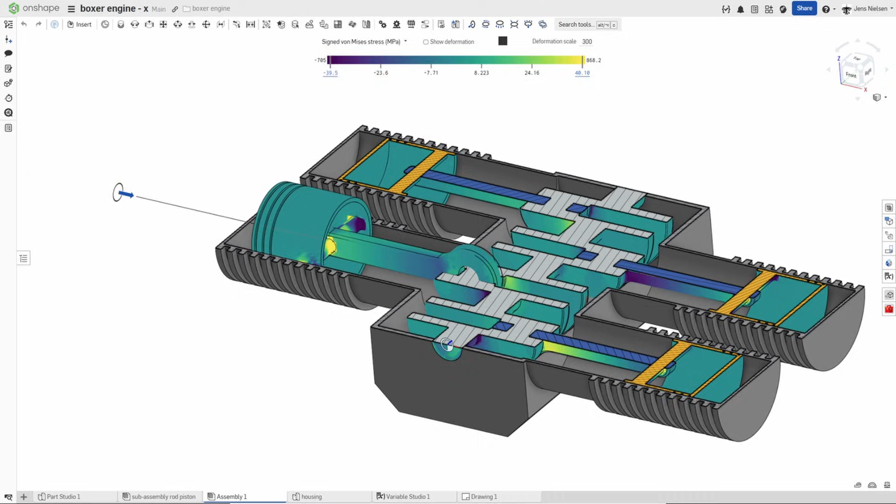We're moving beyond kinematics to see if our engine internals can actually handle the heat using Onshape's professional simulation tools. Before we start clicking, I want to consult our Onshape AI Advisor and ask him about how to set up a simulation.

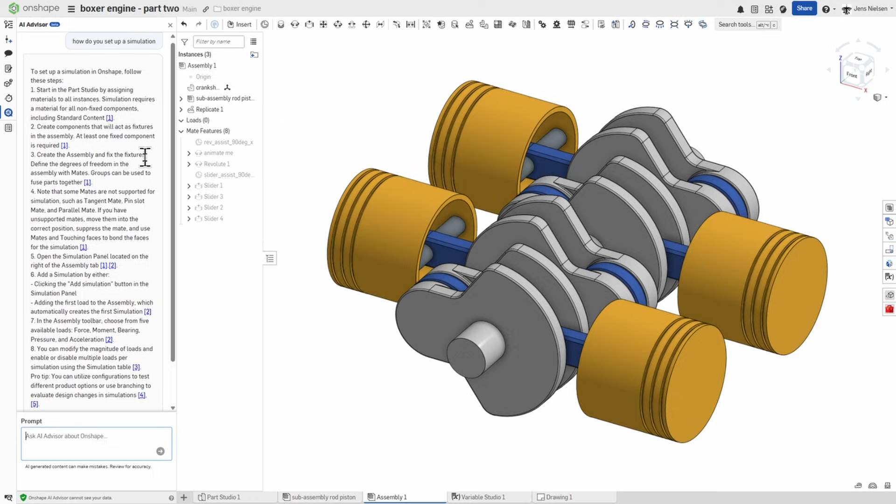Here is the reply. Okay, first you need to assign materials to all parts. Then you need at least one fixed component. Okay, I'll keep that in mind.

So now I want to illustrate in-context design using our engine. First, I'll rotate the crankshaft to top dead center. Now I'll go to the command create part studio in context, show our mates, and pick this one.

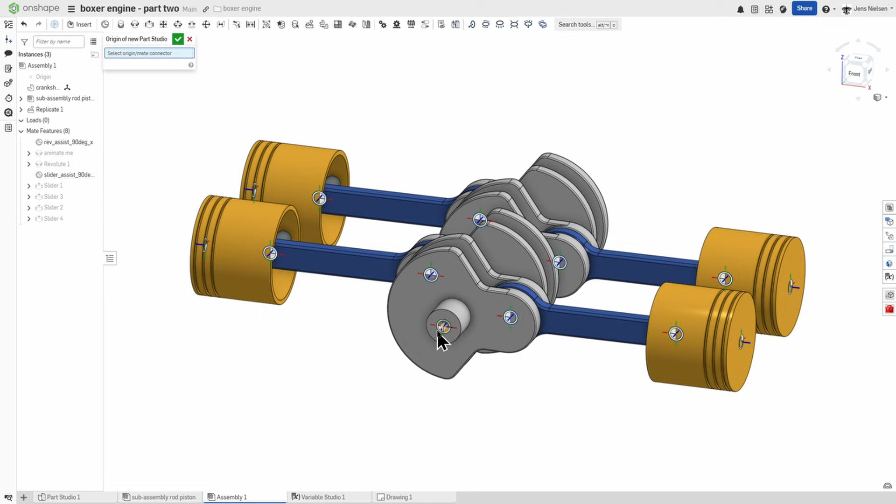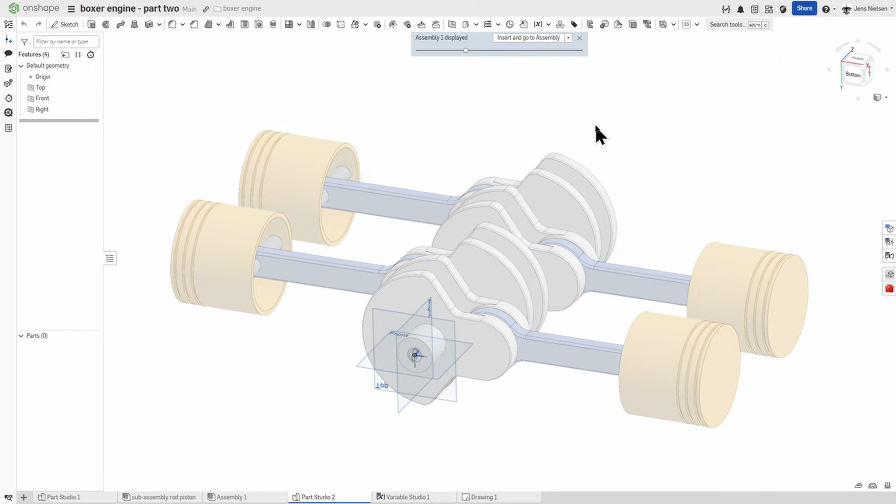A part studio opens and I see our existing parts in transparent mode. I can adjust that according to what I like. And now I will start modeling.

I'll take this plane, project some edges from our existing geometry. That's enough.

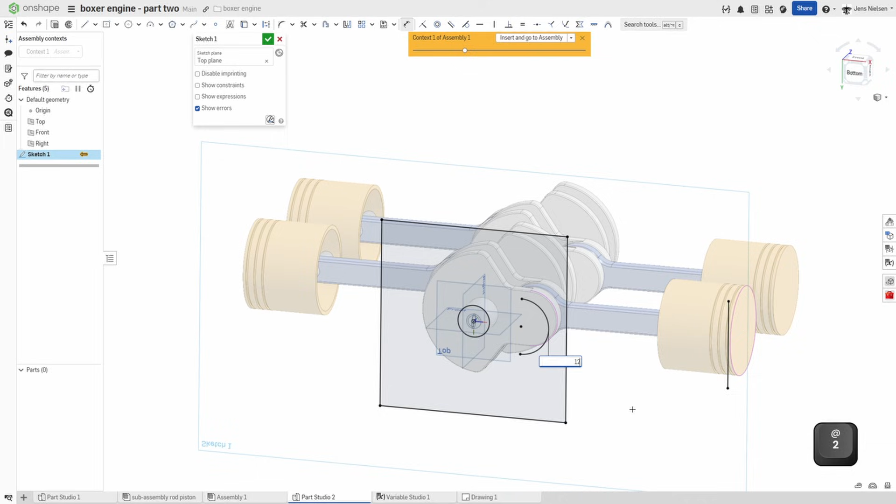Then take the rectangle tool, pressing Alt for a square, apply a dimension of 12, and exit that sketch. Go to the extrude, take these two regions here, and make an extrusion up to that end face.

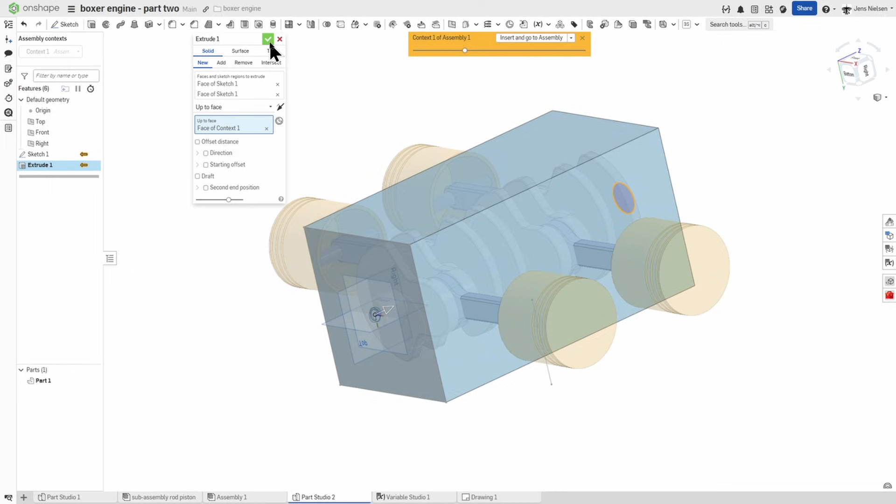I will rename that housing. Change the appearance here.

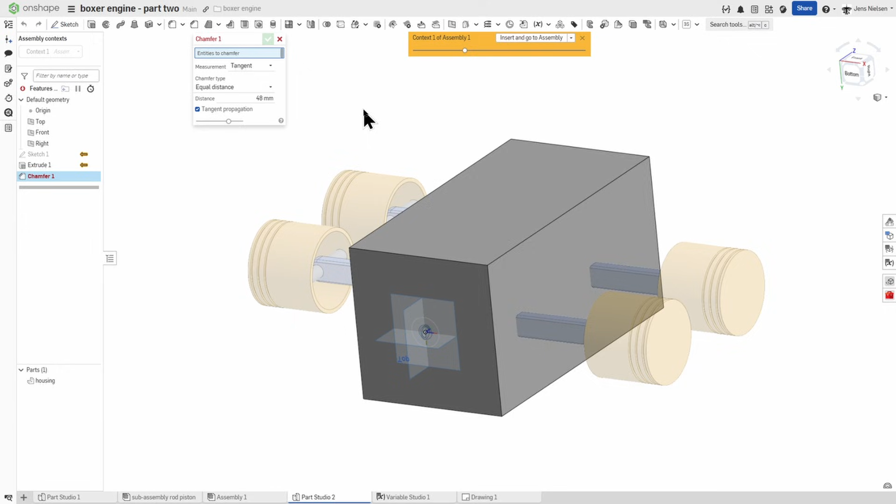Then apply a chamfer. Pick one edge, make a right mouse button click, and go to the select option and take the equal length, so all four edges are selected. I'll take the 48 value here.

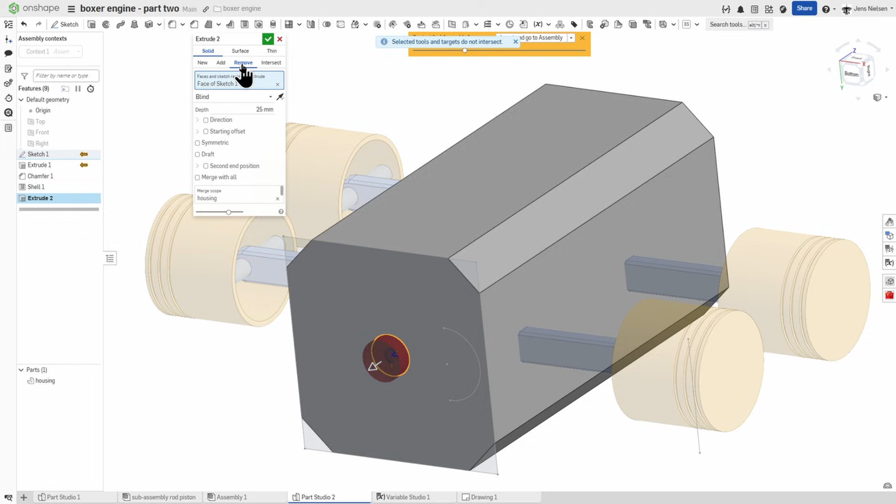Next, I will shell, make a hollow part with an 8mm wall thickness. I'll hide all planes, make my next extrusion, show that sketch, pick that circle, remove that, going through all.

I'll start the next sketch on the side of the housing, project that circle, go into the extrude.

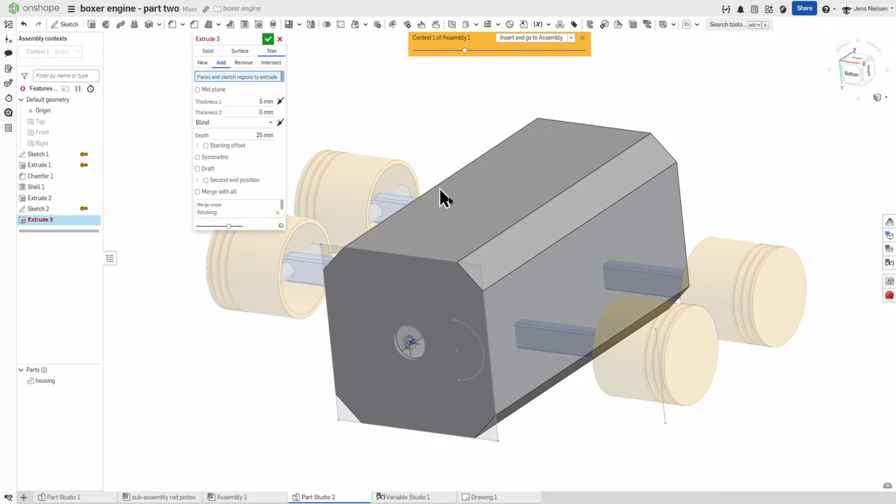Make a thin extrude off that circle with a 5mm thickness up to that face. I'll accept that.

Go to the move face command, take that region, that face, and make it a blind extrude of 66.

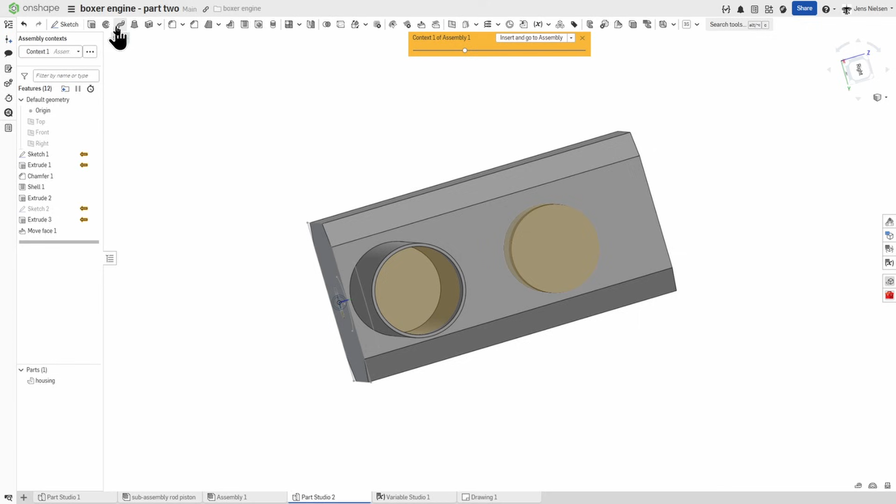I do want to remove that face. Go to next. That's a solid remove.

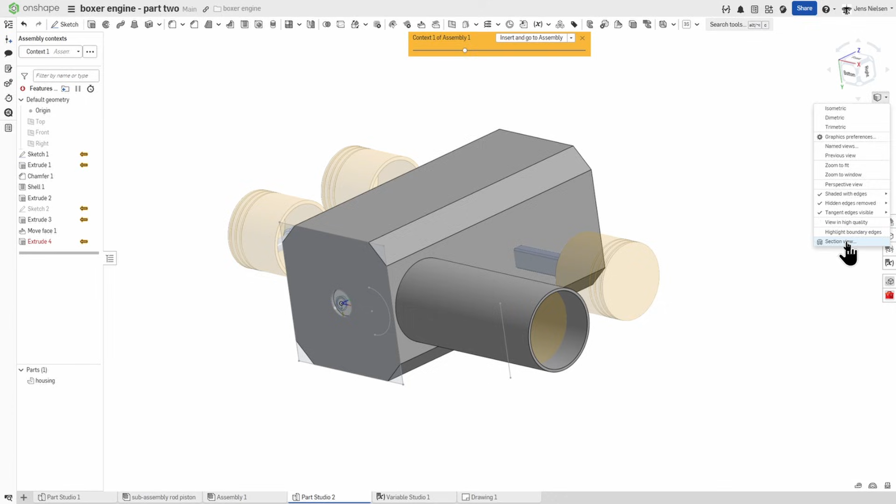Okay, I will show this in section view. Take that one plane here for my section view. Okay, that extrude didn't work out, so I will pick that face again up to next, and that is what I wanted.

I'll continue with a surface tool, fill, take that edge, there's our surface. I will thicken that, adding to our housing with a thickness of 6.

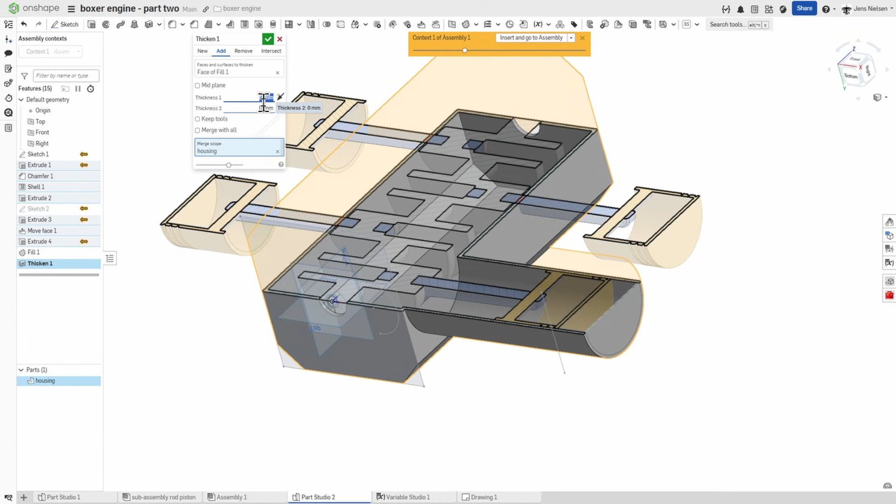And I can hide that sketch here. I'll model some cooling ribs on that face, projecting that edge and offsetting that one with 14 millimeters.

Exit that sketch, extrude that with 12 millimeters going towards the housing. That meant to be adding to our housing.

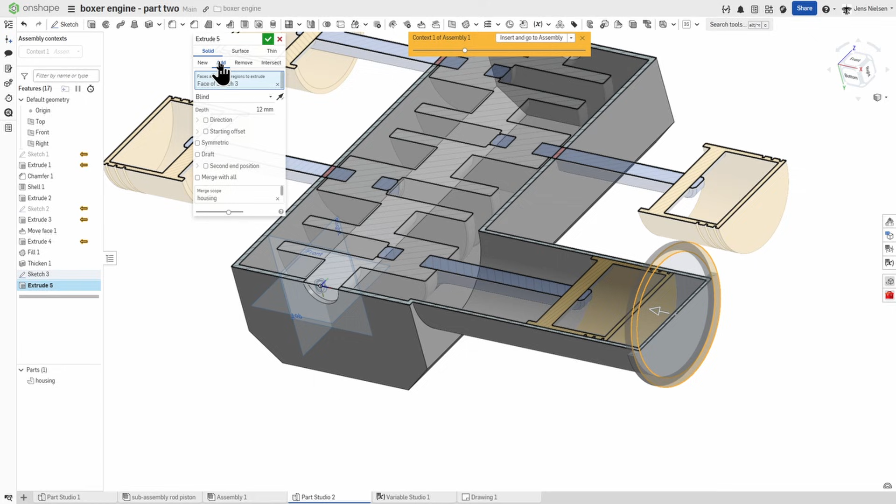Now I will pattern that feature. Direction is this one. I'll reapply that feature and make that distance 24 times 12.

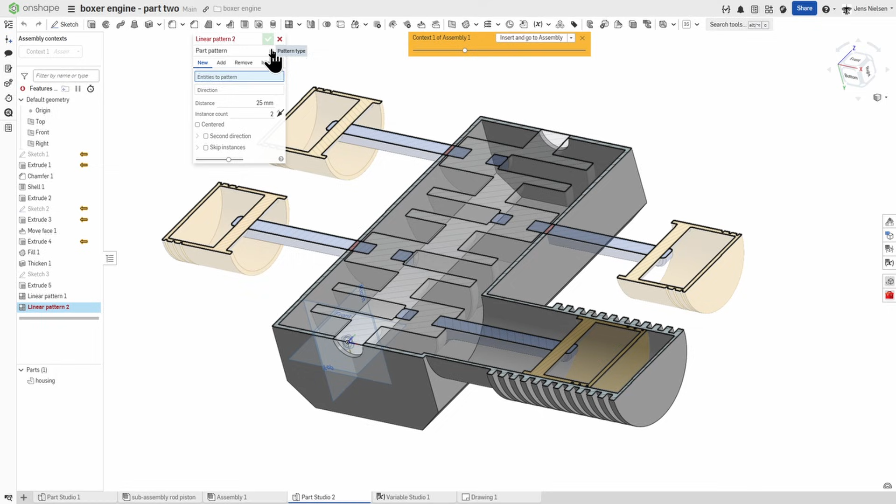Next, I want to pattern this part over to the other 3 pistons. So I'll go to the linear pattern of features. And let's see where we started here. That was the first, that one, that one.

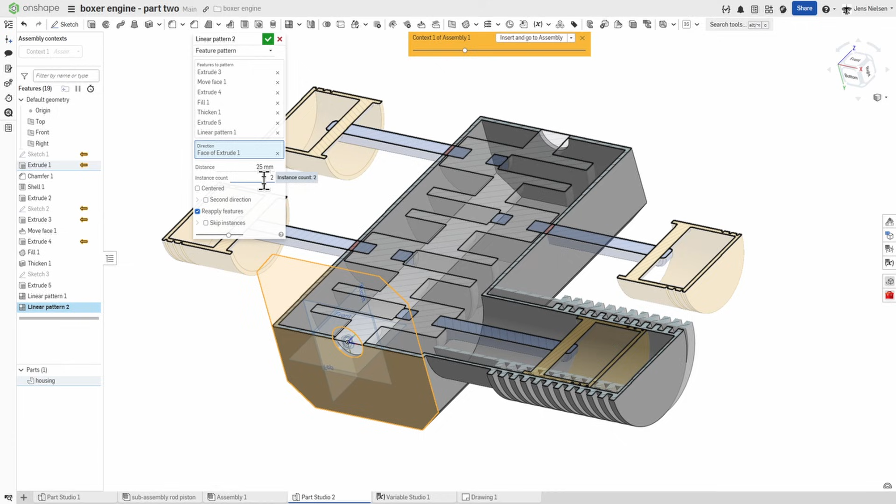Take all those patterns here. Direction will be this one. Reapplying that feature again. And about that distance, remember that we had these variables, that interval.

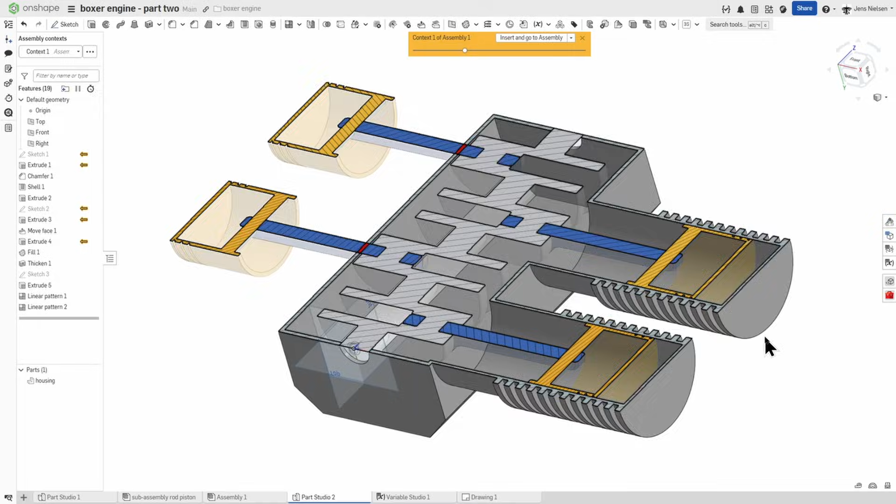So this is what I'm going to insert here: interval times 2. There is the second one of those.

Now I'm going to mirror these features over this plane here. Accept that.

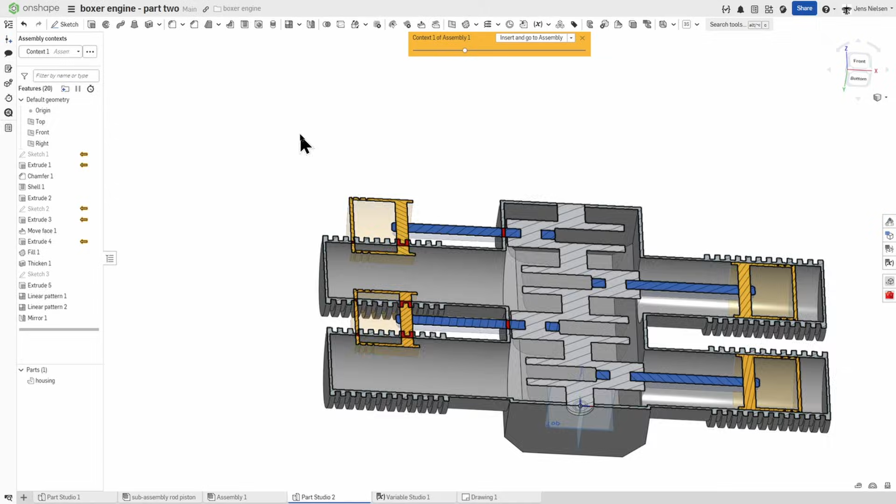Then, okay, we need to move these up, and we can do so again by the move face command. We'll just make a window select of these. Go to the translate.

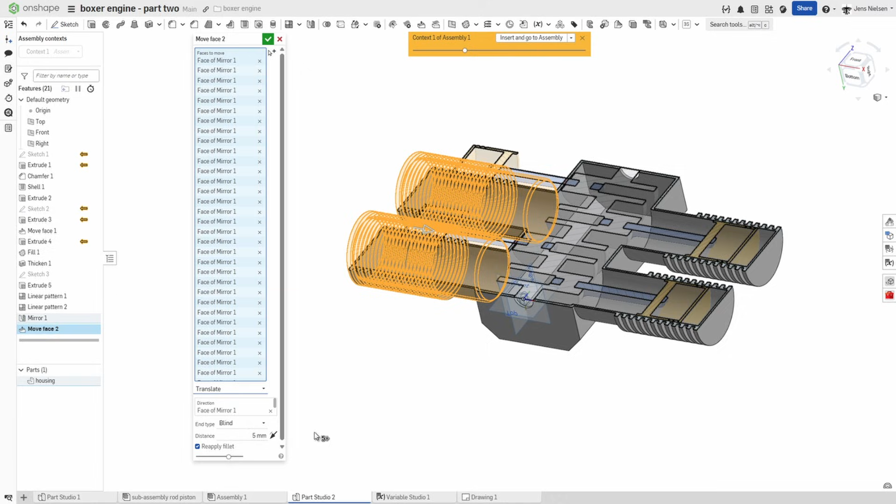The direction is again this one. And just move that by 1 interval.

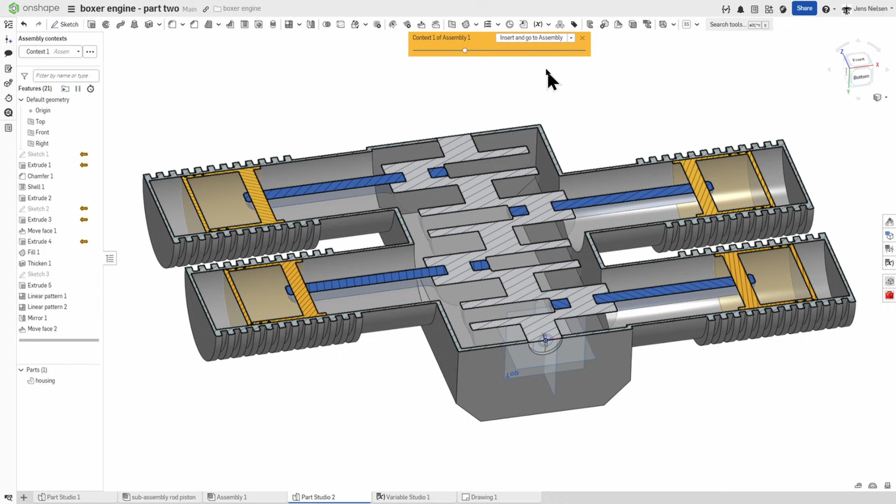All right, so that's it for modeling. And now we're ready to start our simulation. All these arrows indicate this context we created in the assembly, context number 1. So I'll go ahead and insert our part in our assembly.

I'll continue with the section view.

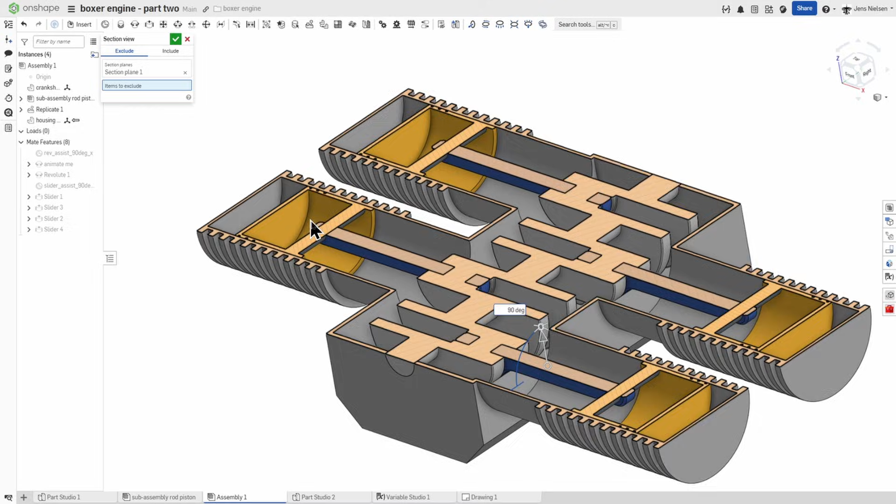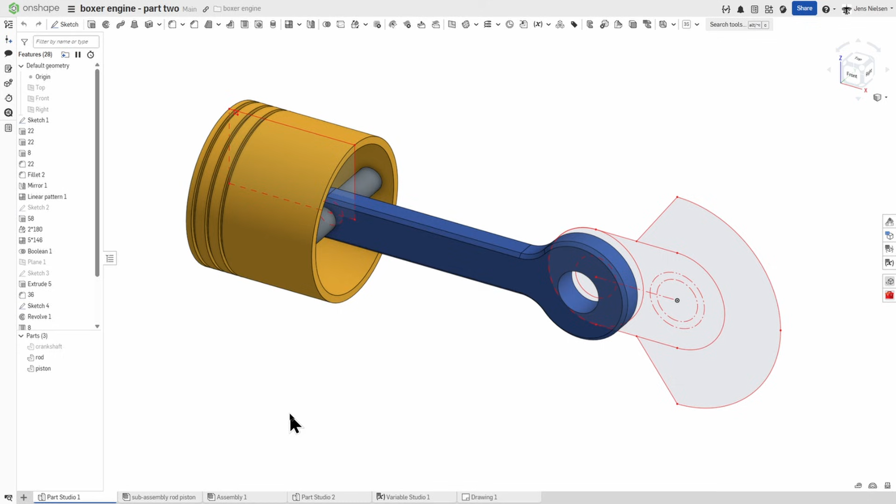And exclude these two parts of the section, because here is where I want to apply our simulation. I'll make this housing a fixed component, and before I forget, I will apply the materials

to our parts. For the crankshaft, I'll apply steel 4130. This is a high toughness alloy. Let's have a look at the properties, especially the tensile yield strength. This is the most important one for our safety factor. That value in megapascals is 435.

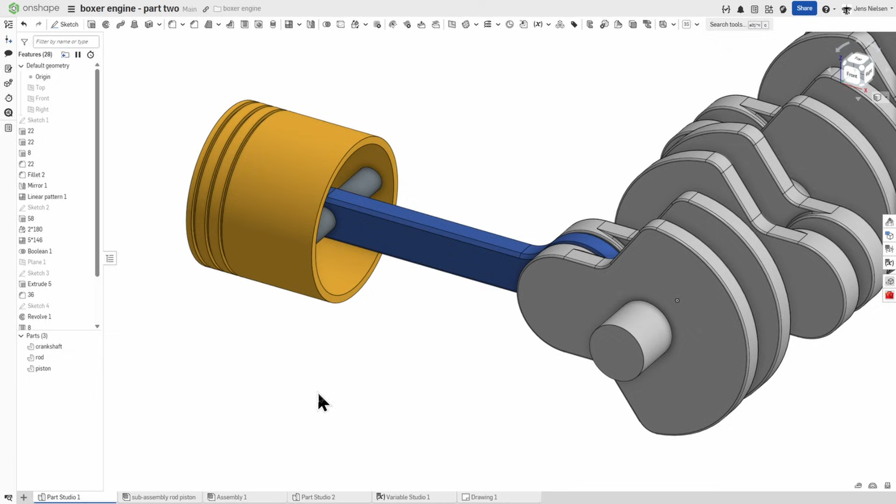I'll apply the same material to our rod, this one. And for the piston, I'll take an aluminum, the aluminum 6061. Let's go back to our assembly.

Now let's make that simulation. One thing to note, these native FEA tools are a professional feature. If you are on a student or free plan and don't see these options active, you can get a professional trial using the link I've put in the description below, so you can follow along.

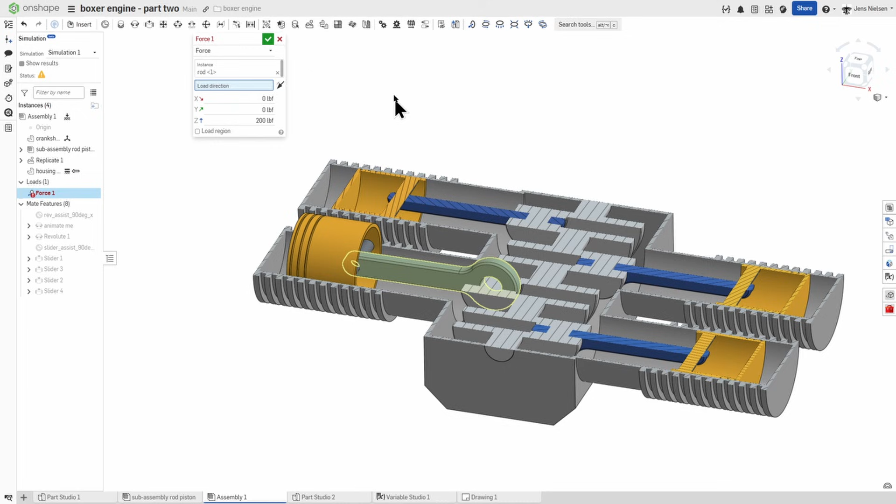I'll pick this one, the force, apply that to that rod, the load direction will be in this axis. I'll turn that around and apply a value of 7,000 Newton.

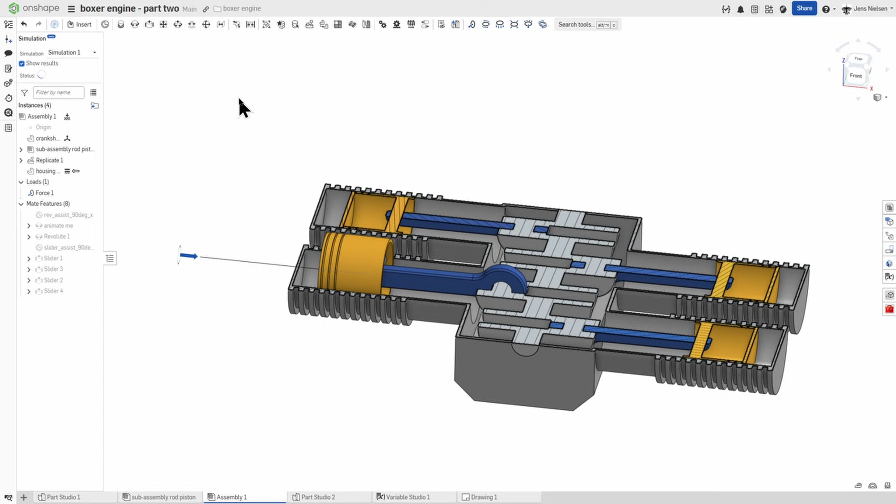I see that here our simulation, and I'll go to show results. All calculation is done in the cloud, so it doesn't tax your computer. And there we have the results.

Let's have a look at the displacement. And here's the value, 3.69. That's about 37 microns. To put that in perspective, that is less than half the thickness of a human hair. There's a deformation scale and a play button. Okay, that's a bit extreme. For my taste, I'll put that to 200.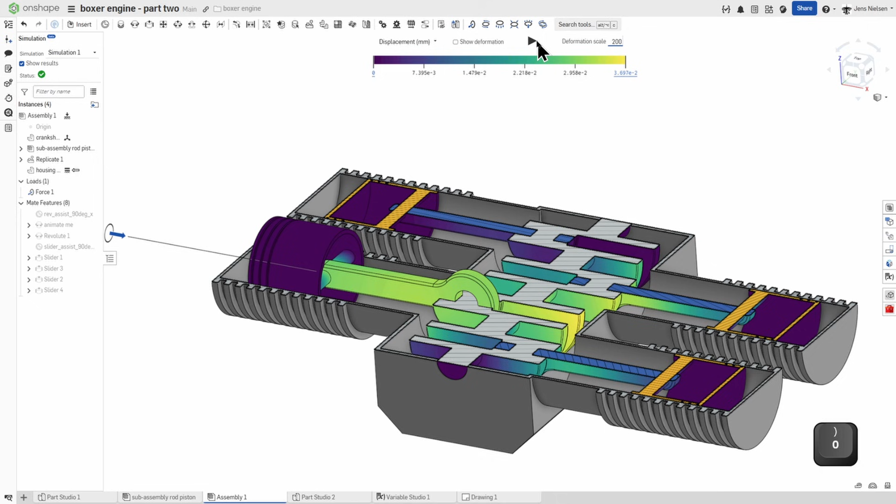And so we can have a visualization of that displacement. Let's go to von Mises stress. So there we see the areas of the highest stress.

We can pick the signed von Mises stress. There we have negative values and positive ones. Negative values indicate a compression, and positive values indicate a tension. This indicates that the material is being pulled or stretched. Sure, we can animate that as well.

Let's have a look at the safety factor. And it stands at 3.5. The safety factor of 3.5 means that the engine could survive 3.5 times the current combustion pressure, up to 24,500 newtons, before the metal even begins to permanently deform.

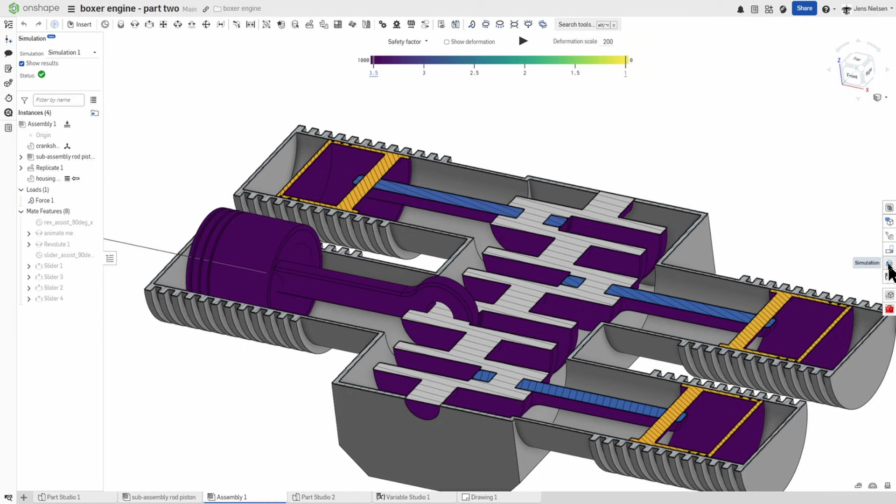Let's have a look at the simulation panel, which you can find here. Here we have the control over our simulation and can find all relevant information about it. We can as well add a simulation. We have the choice between a linear static simulation like the one we got, or maybe a modal simulation.

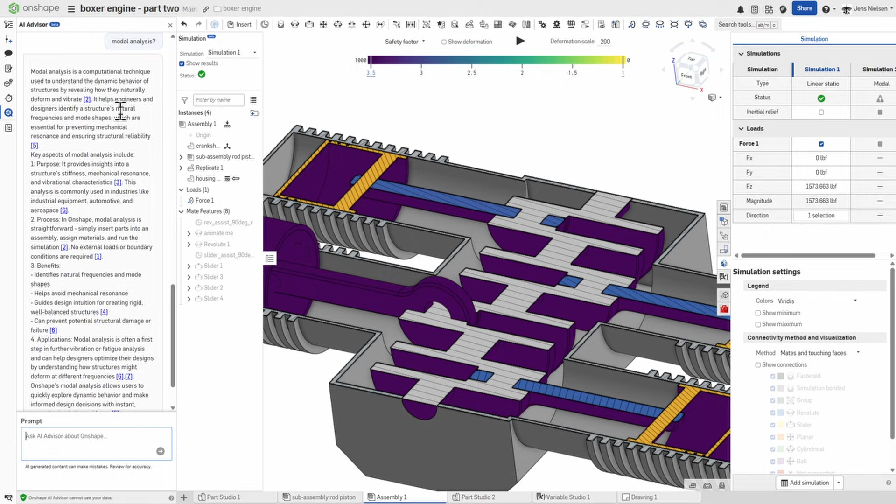In case we have a doubt about what a modal simulation is, we'll just ask our AI advisor again. And we are informed that a modal analysis helps to identify a structure's natural frequencies and mode shapes.

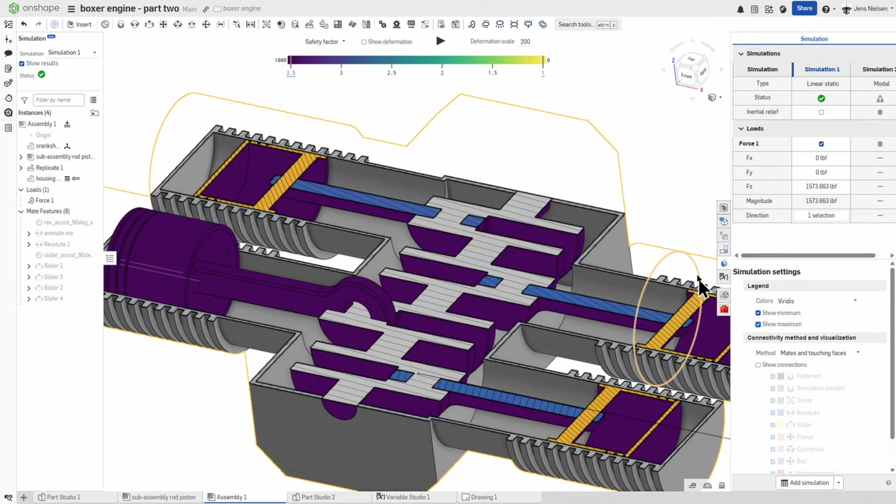We can modify the forces of our loads, review the direction of that load, fine-tune the appearance, the color scheme to blue-red or plasma rainbow. I'll go back to Viridis. There's an option to indicate minimum and maximum values of a selected result. So there would be the minimum in terms of safety factor and the maximum.

One of the most powerful things here is how Onshape handles connectivity. Under the settings, you can choose how the software interprets the touch between parts. By default, it uses our assembly mates, which is incredibly efficient. However, you can also manage connectivity logic here: mates and touching faces, or just mates, and bond all touching faces. This tells the solver exactly how force should flow from the piston face through the pin and into the rod. We'll stick with a mate-based connectivity today because our assembly is already fully defined.

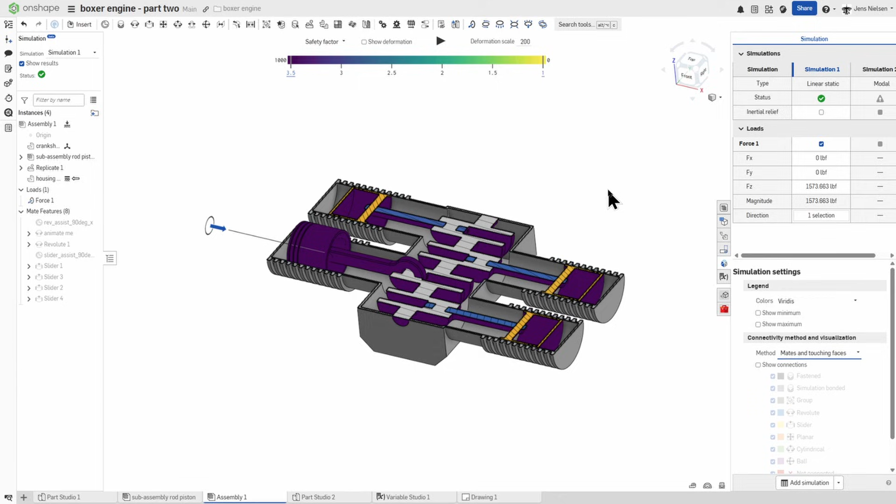It's impressive to see how everything is integrated into one platform. Designing the parts, building and animating the assembly, simulating the physics, and even having an AI advisor on hand if you have any doubts. Integrated engineering, that's the Onshape difference.